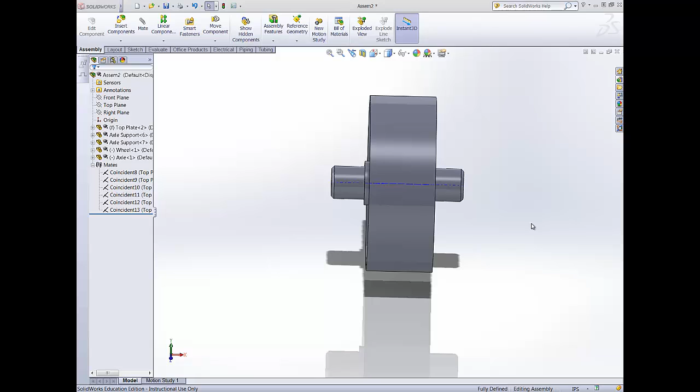So our last little step we did there in our last video clip was to remove those constraining mates. So I'm just going to pull this back apart. So we now have the wheel and the axle separate. The top plate and the axle supports are still fine, but I do need to redo this mate condition so we have everything lined up properly.

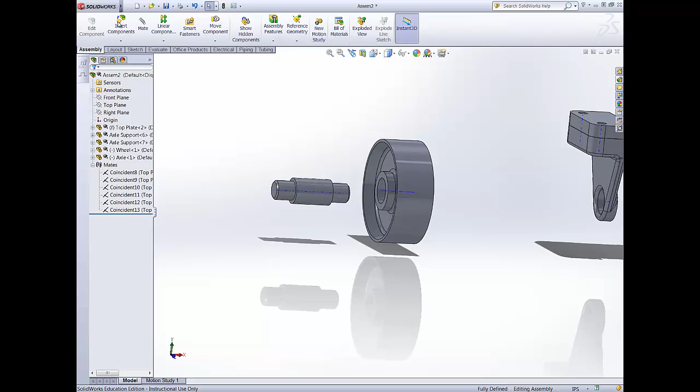So again, I'm going to go into my mate options. I'm going to do a coincident mate with the temporary axis of the axle to the temporary axis of the wheel and the hole inside it, and line those back up. Now my numbers are all correct. The outside of the wheel is 1.5 inches. This portion of the axle is 1.5 inches. There is where my matings are going to lie.

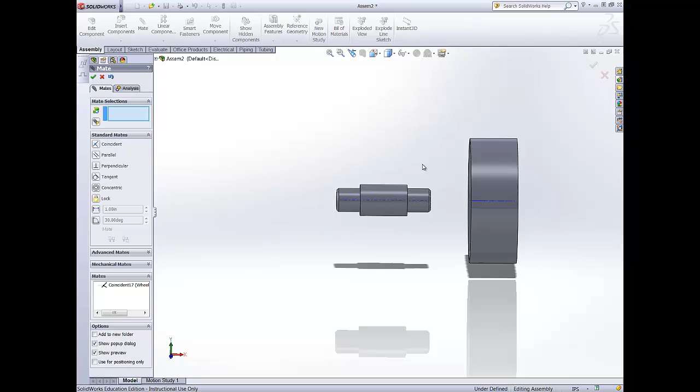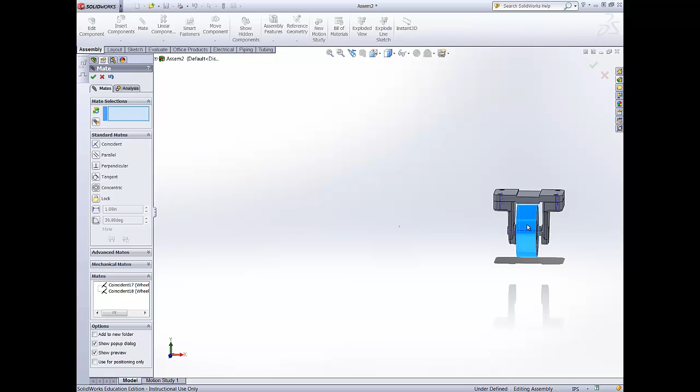So I'm going to take the surface of the shoulder here to the surface of the edge of the wheel, and that places them so I have an equal distance on each side. Lock that down. And now I can go ahead and slide the whole assembly back into position inside the supports. And I did that visually because I do want to make sure everything gets aligned.

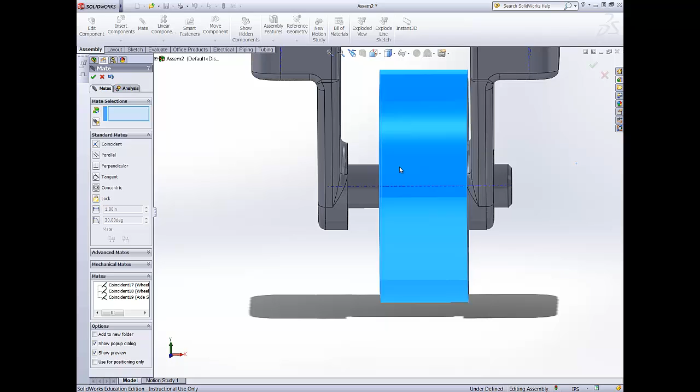And I noticed that I need to realign. I took out probably one too many constraints before. So let's go ahead and add that mate back in. So this temporary axis to this temporary axis. Now they're back in alignment there. And I'm ready to place it into position.

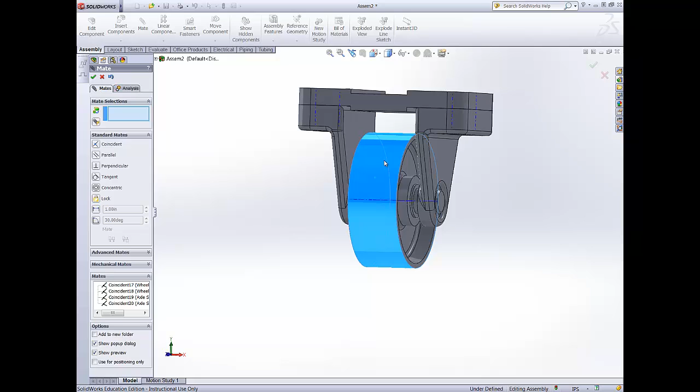And I'm going to do that with a face-to-face mate. Just do the surface face here, and lock those down. And that should keep everything mathematically in alignment. So now my wheel is in the proper location. The wheel is still free to move separate from the axle. Okay, go ahead and complete that process with those few controlling mates.